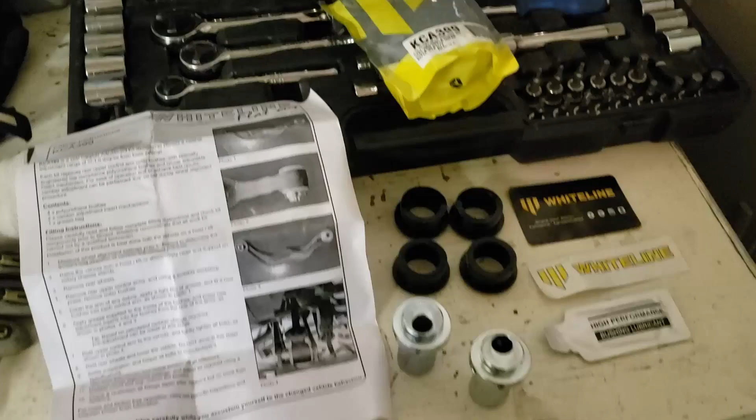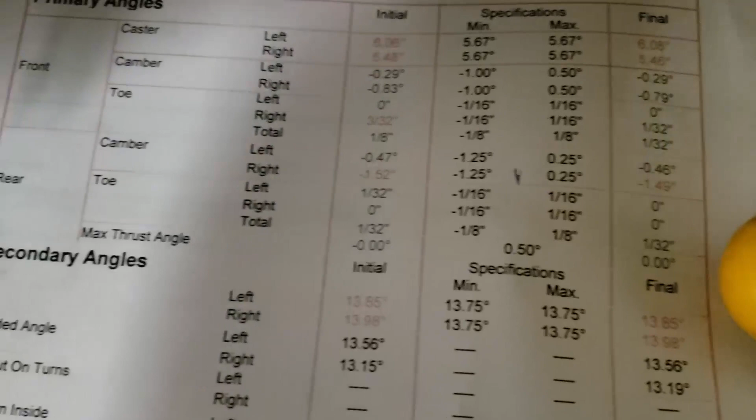Alright guys, so I'm continuing my mission of getting this car past the provincial safety inspection. You know, even though the thing was completely safe to begin with. And they did an alignment and told me that my camber settings were not good enough. Minus 1.5. And that I have to fix that before I can get the thing checked off.

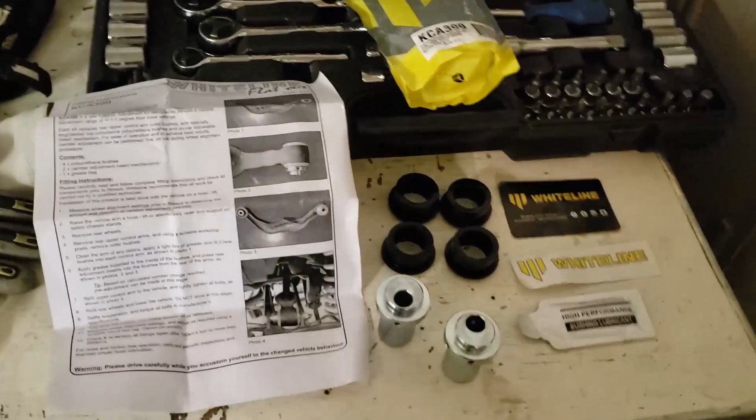So, Legacies have no factory rear adjustable camber, unfortunately. So basically I've got the rear wheel off there, and I'm going to install this KCA399 Whiteline bushing set. And this gives us adjustable camber in the rear up to a degree, as it says right there.

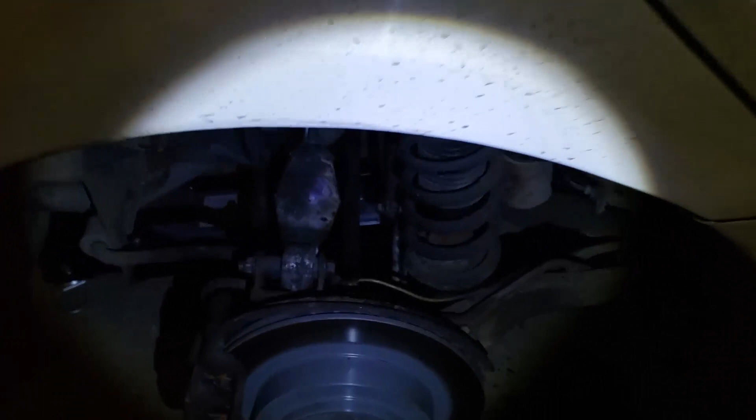So basically I've got the wheel off, as you can see. I'm going to go ahead and take this upper control arm off. I actually did end up getting that off myself, and I'll talk about that in a second. But first I've got the kit laid out here. This is everything you get in it.

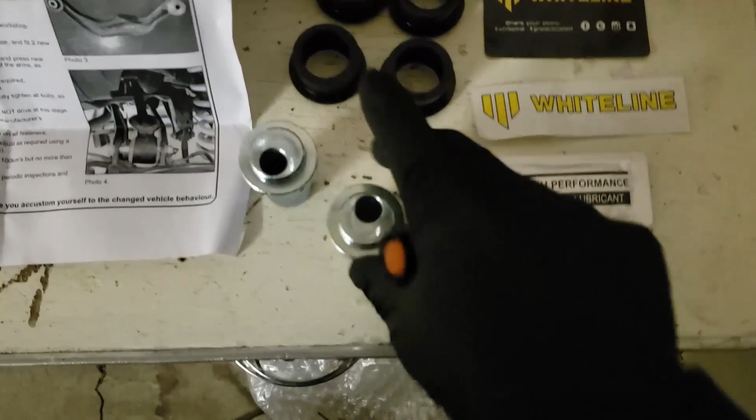The bag, the instructions, the bushings. They're all the same. And then some grease for your bushings and the actual metal sleeve that gives you the camber adjustment itself here. Kind of cool. We'll see how easy that is to adjust when it's on the car, but supposedly it's not too bad. So, moving over here.

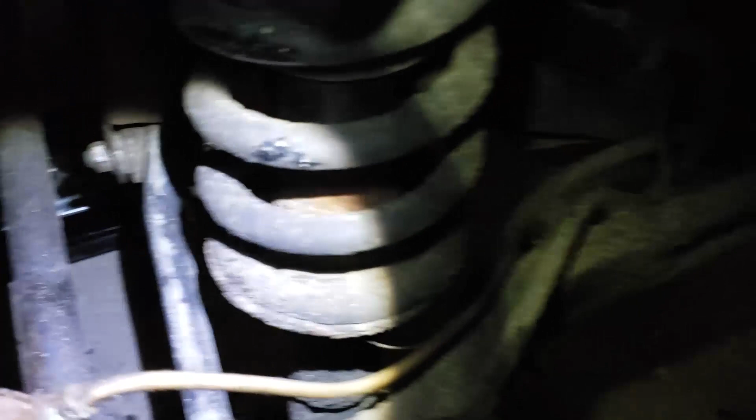So I got the wheel off. In the last video you saw, I replaced that lower link there, lower control arm. And then I went on later and replaced this upper one. This is actually an aluminum JDM Spec B one. Doesn't matter if it's JDM Spec B, I doubt I'll feel the difference. But I got it because I got a good deal on it.

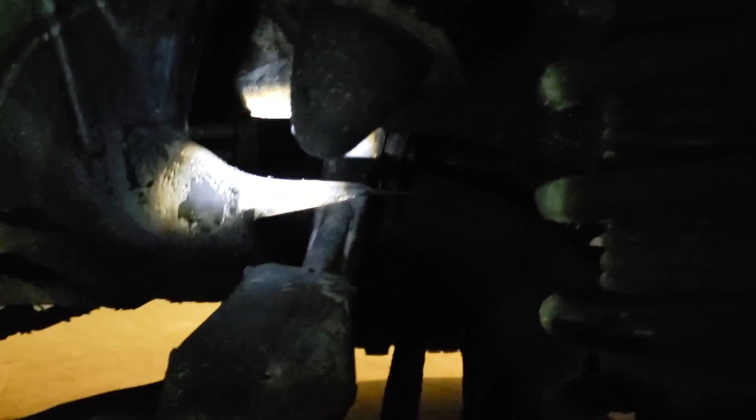So if you're going to do this modification, you got to get this off yourself. And from everything I've heard, including my own experience, and this is what happened to me in the last video, that nut, let's see if I can get a good angle on it, right in the back there, is extremely prone to seizure. That one right there, yeah. Very prone to seizure and rusting, and is gonna give you a hell of a time to get it off,

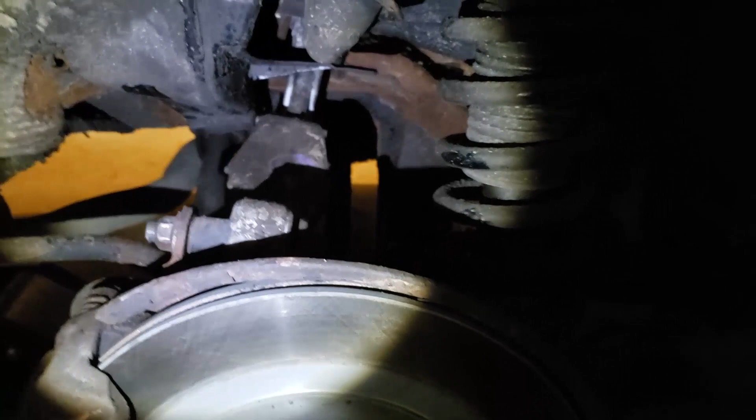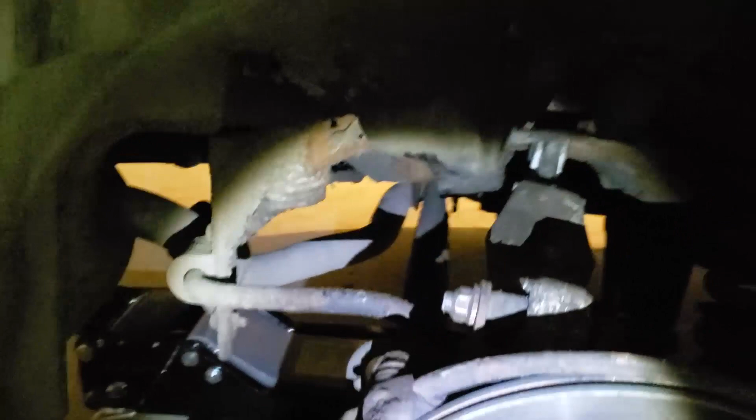most likely. Funny enough, I took this to a shop, like I said I was gonna do in the last video, and the damn shop worked an hour at the thing, told me it's frozen, they can't do anything about it, and then put the car back on the ground. And I said, screw you guys, I'm picking it up. Brought it back home, and did it myself with some hand tools and an auto lift. So I'm going to give you some tips here on how to actually do this yourself.

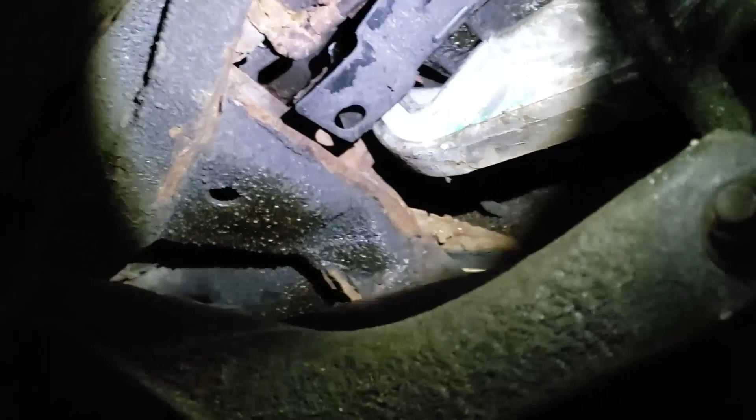So because, as I said, that thing gets so rusted on, let's see if I can get a better angle at it from the back here. Yeah, there it is. So you see this little plastic bit here hanging down? So what you want to do is unbolt that from the car itself, which is this little son of a bitch. That little plastic hanging thing there.

It has a little poppet that goes into the frame, and I popped that out and I pulled it down, and it gave me some more clearance back here. Jeez, this is really difficult to show you guys, eh? Yeah, it gives me some more clearance back there where I could slip some more tools.

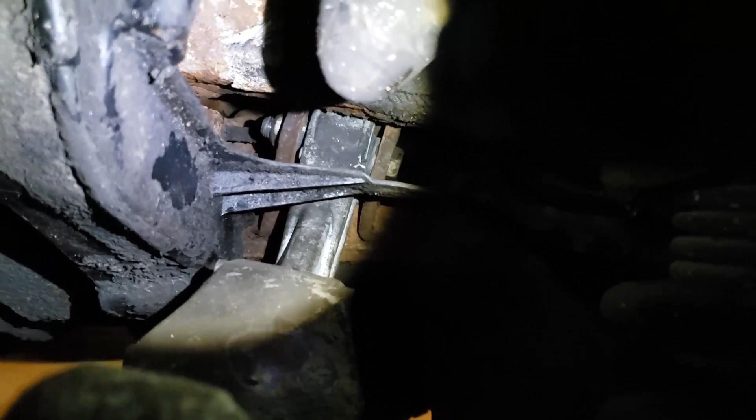So apparently they told me they tried to torch it and they tried to do a whole bunch of stuff and it wasn't working for them. Don't know if I really believe it, but whatever. I took it back here. I torched it myself. I then took a metal file, and filed it down, and slipped.

Filed it down with one of these, and slipped that wrench on it there. This is a 17. Actually, I didn't slip that one on. I slipped a 16 on there. It's a 17 bolt, but I filed it down and got a 16 on there, and that gave me enough grip. I actually had to hammer that on. And that gave me enough grip to get it off.

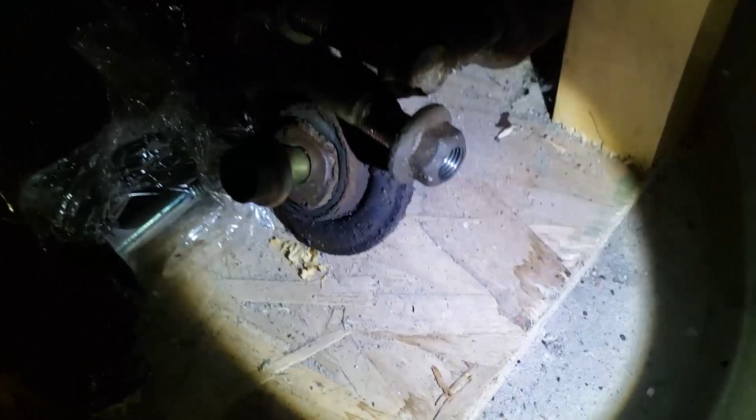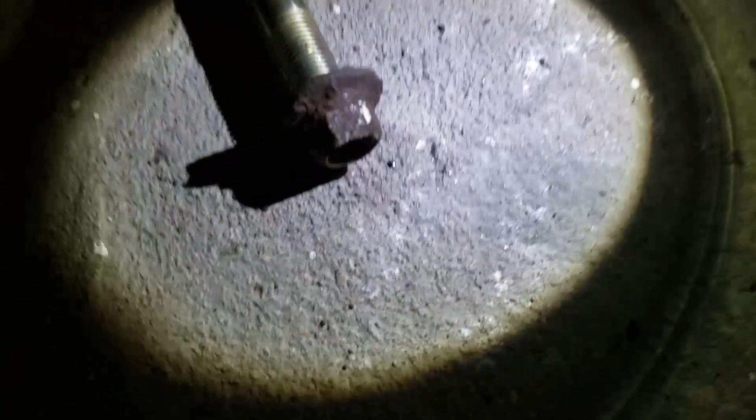There's the control arms themselves there. You can see they're pretty mangled. But here's the actual bolt. No, not that one. It's this one. Oh yeah, look at that. So what happens is that these damn things, because they're like convex like that, look how rusted that is. Your wrench won't properly sit on there. It doesn't get all the way on.

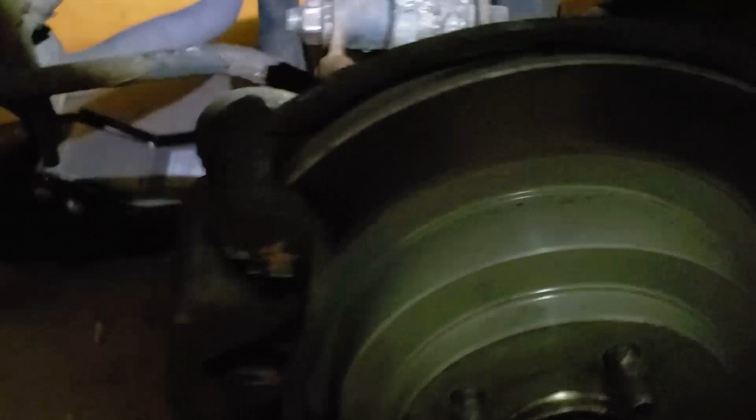So that's why. I don't know if you can kind of see the grooves, but anyway, that's going to be a throwaway when you're done with it, so make sure you get yourself some new bolts. So that's just some tips on getting that thing off. When you're done, you're going to torque it back down to whatever the spec was there. I think I wrote it on the last video. It's definitely not 89 though, so don't do that. Anyway, so that part you can figure out.

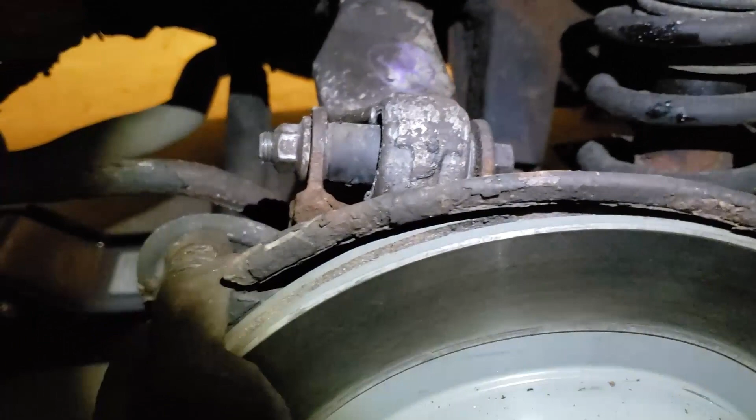Just take this off, take that off, get the arm off, and then what I'm going to do is send this to a shop and get them to press the bushings out, because it's actually just this bushing, because I don't want to deal with it myself. I don't have a press. Yeah, so the Whiteline kit is going to replace this bushing right here, and you'll see there's nothing too complicated here. So I'm going to go ahead and take this off, and we'll go from there.

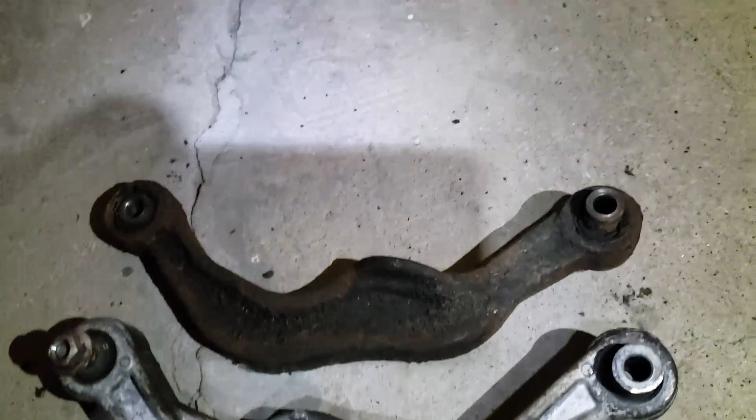So I got the control arm out there. This is the aluminum one. That's the original one. Let's take a look at the bushings here. So obviously that bushing was shit. That's why I had to replace it. This one's good, but it's going to get replaced with that insert there. So basically the way I rotate that insert is going to give me more or less camber. And then I'll have the polyurethane stuff around it. Just make sure you jack that up if you're having trouble getting those bolts out, and then everything should come smoothly from there.

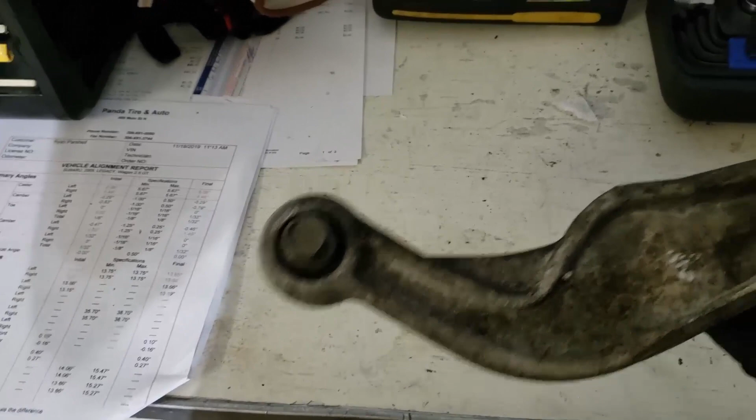So I got the control arms back from the shop, and as you can see, they pressed the outer bushing out there nicely. So it's time for these things to go in. So using this little grease that I got with the kit, I'm going to grease all this. This is already pretty clean. You're supposed to sand it down and clean it out before, but it all looks really nice. So I'm going to grease all that right away.

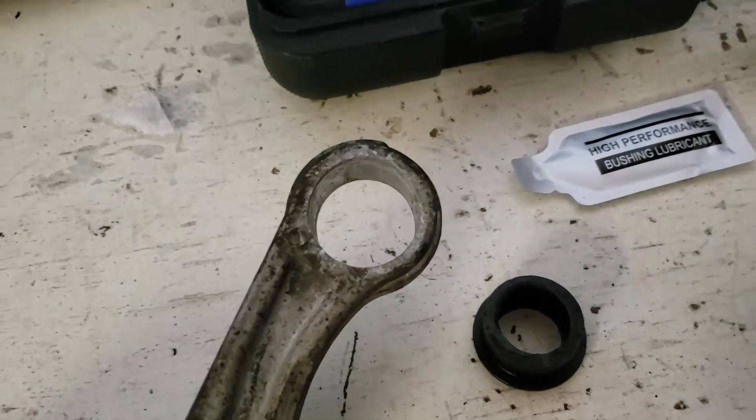Then stick these in, one from each side. They're all the same, so it doesn't really matter. And then once that's in, grease the inside of that too, and then pop that in. And I'm going to set it for as much positive camber as I can get, which is going to be a degree. I'm just going to put it into spec on that wheel there. And then on the other one, I'm going to try and match the factory setting, or get it as close to center as possible. We'll see how that goes.

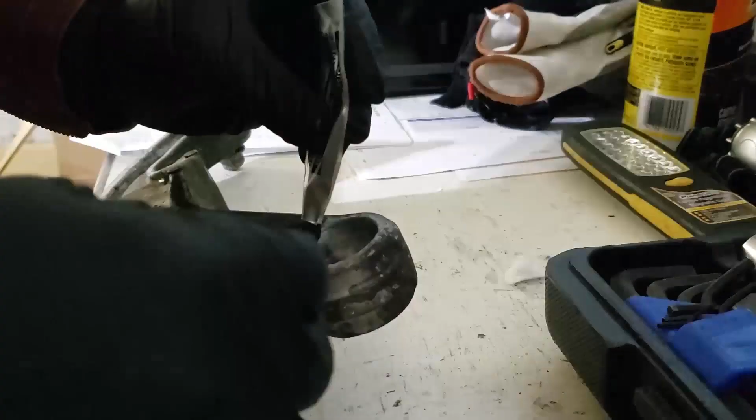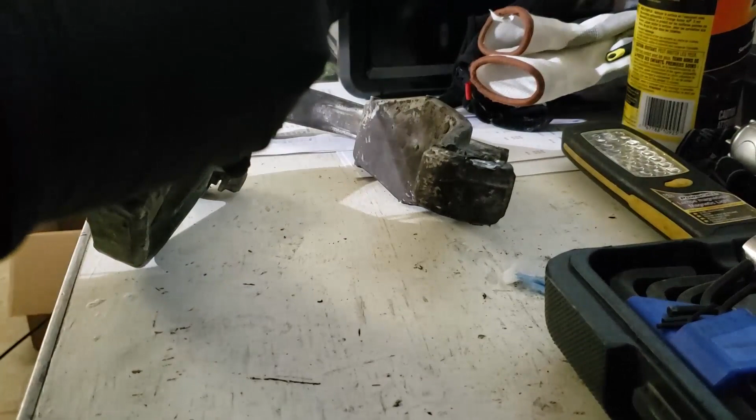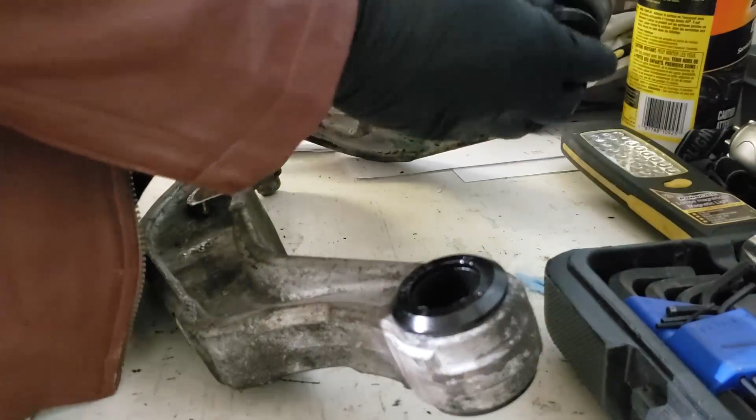Pop right in, no issues. And that one too. So those are in there.

And now I don't know if you can see that, but I got this crazy new light, super bright in my garage on that side now, but not this side. Anyway,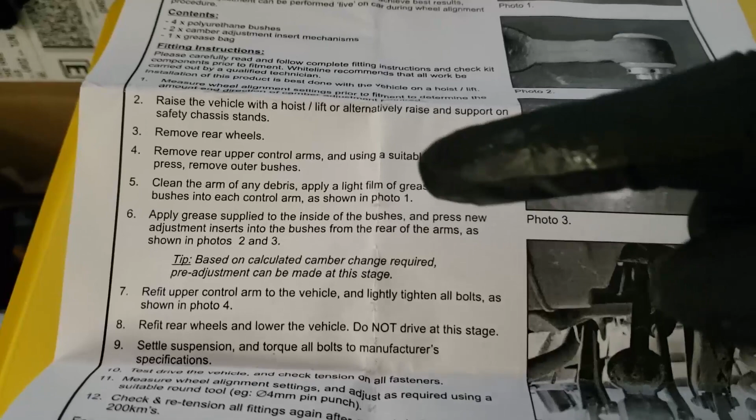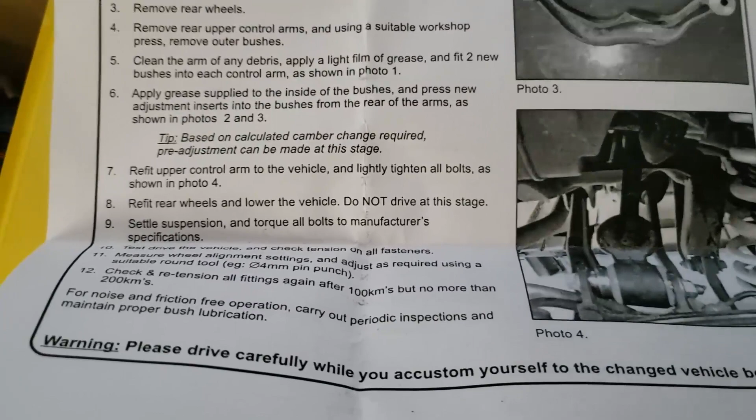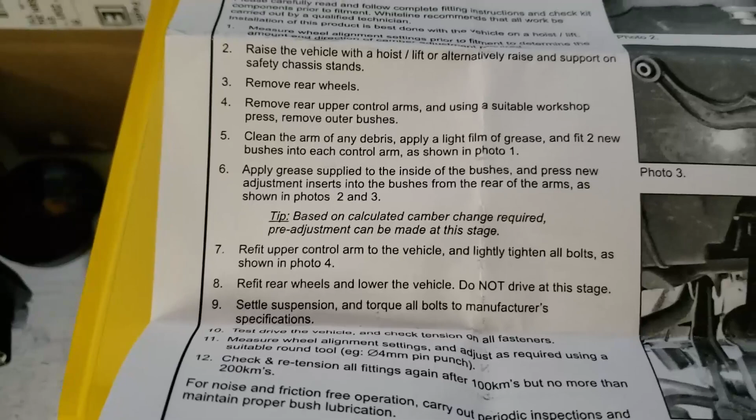yeah, it's kind of knurled in there, which leads me to think that maybe I shouldn't grease that. But if you look at the instructions here, it says, clean, apply a light film of grease, apply grease to the inside of the bushes, which are the rubber things, polyurethane bushes. So I guess I should apply grease to that. If I'm not supposed to, well, what's the worst that's going to happen here? I'm just following the instructions, doing exactly what it says, so we'll see what happens. Press in new inserts in the rear of the arms. Okay, cool.

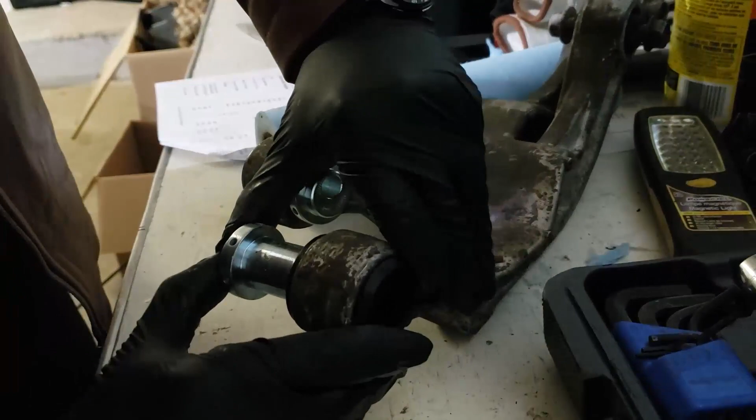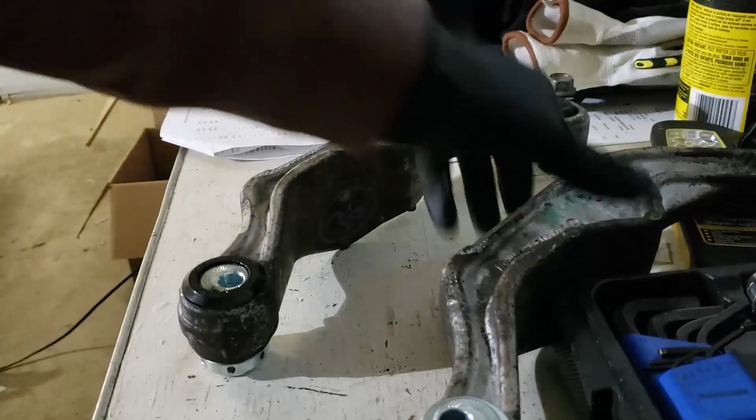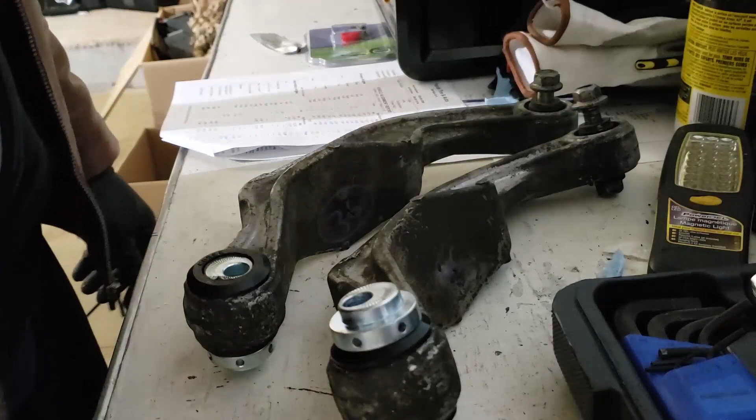So that's in. Now, I'm going to try and adjust them a little bit, and maybe even mark kind of a line once I got it across, so that I can realign them once I get them on there. Yeah, and the next thing I'll do is bolt them back onto the car.

Okay, so I've got the control arm installed there. You can see the little black lines that I put on the bushing itself and then on the control arm line up, which means that I didn't have too much movement, which is a good thing for me because I don't want to reposition this thing. I've got the other side bolted up there very lightly. I put anti-seize on all these bolts just so that it's not as much of a pain getting them out next time if I need to.

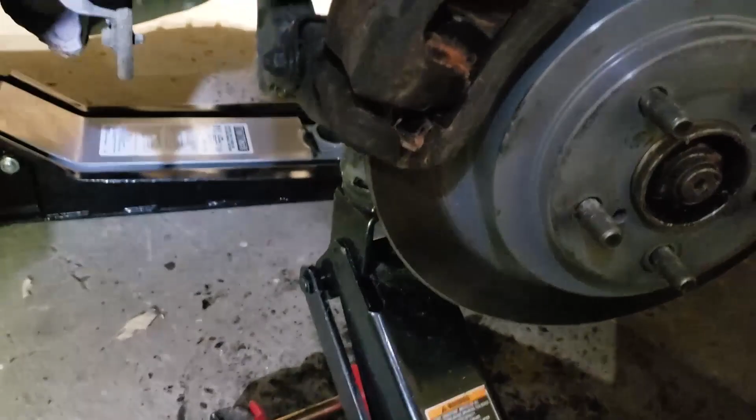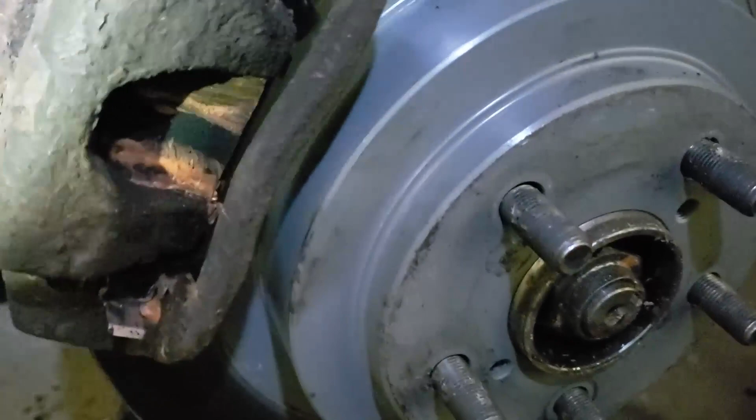And I had to jack the knuckle up to do this. So now that I've jacked the knuckle up this much, it actually lifted the car off the jack stands. So you don't get much more weight on wheels than that, and that means I can torque these things down without having to lower the car on ramps with the wheels on. So that's good. If you want to do that, just make sure you're using the knuckle there and not any of these bars, lateral links, axles, anything that's going to destroy your car.

But yeah, we're going to go ahead and torque these down to the torque spec and then put the wheels on, and that's about it. I'll see if the camber works. I'll get an alignment tomorrow to get that inspection done, and that was kind of the whole point of doing this to begin with. And if the technician has any issues adjusting these, I'll leave an update in the description.

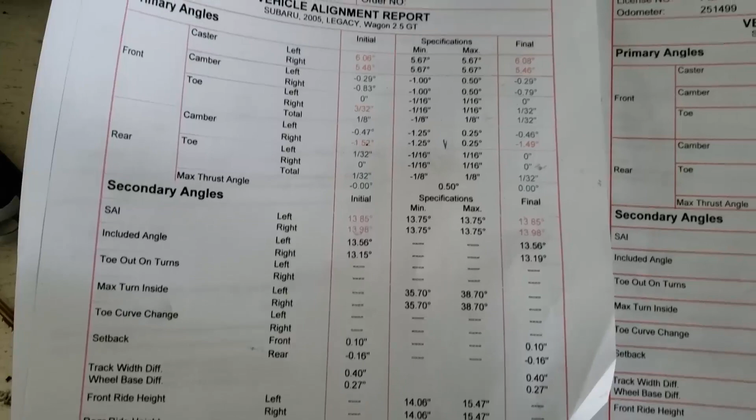Okay, so just a quick follow-up on the bushings here. So I got them in the video, as you saw. Got them all installed, got everything put back together, and set the camber the way I thought it should be myself. And this is what I was able to come up with. So this was the original, minus 1.5 and minus 0.47. The left was fine, the right was still out.

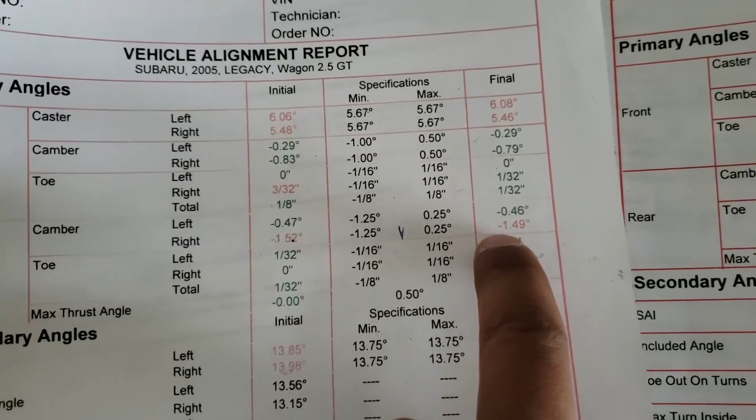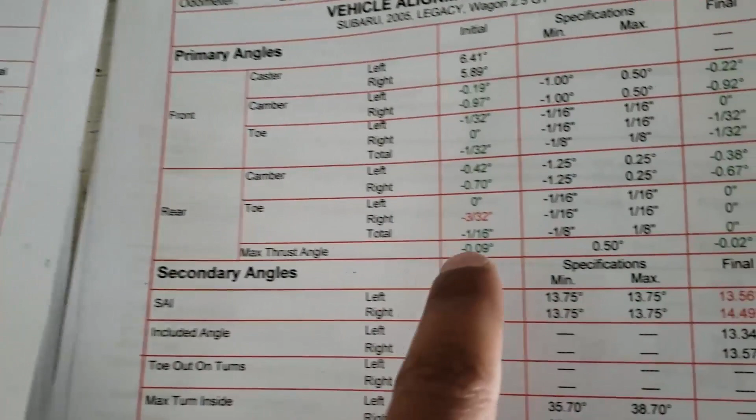And with the camber bushings, the KCAs, we got to minus 0.7, and then the final was minus 0.67. So from minus 1.5 to minus 0.7. So they did their job. That's a pretty good result, especially just for eyeballing it. The only thing is that kicked my toe out, apparently, which meant that they had to do an alignment on that, and boom, like $100 later, we're all green.

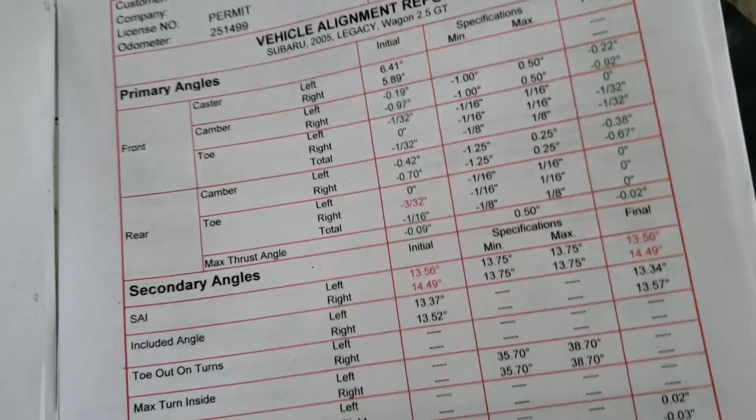But the main thing is I was able to register the car. I got my plates on here finally, so I can start getting to work on it and not worrying about having to take it for an inspection.